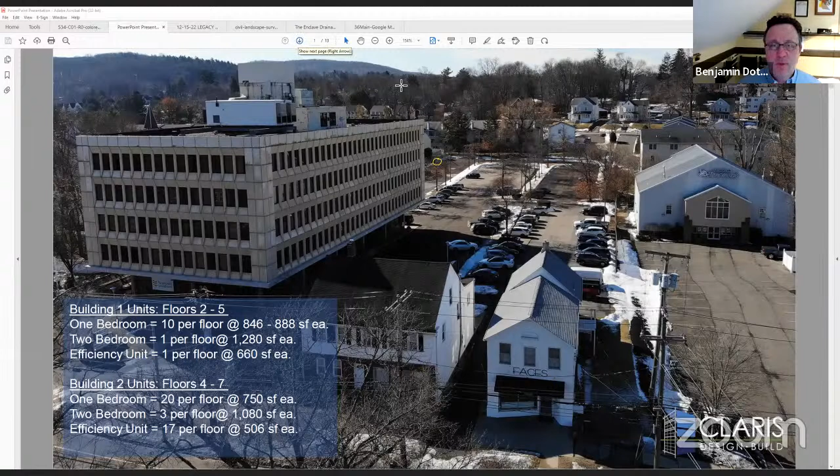Front building, we are adding decks and balconies for the residents. And you can see the main driveway pattern, how the new driveway will function compared to the one we have today, which is a very awkward driveway.

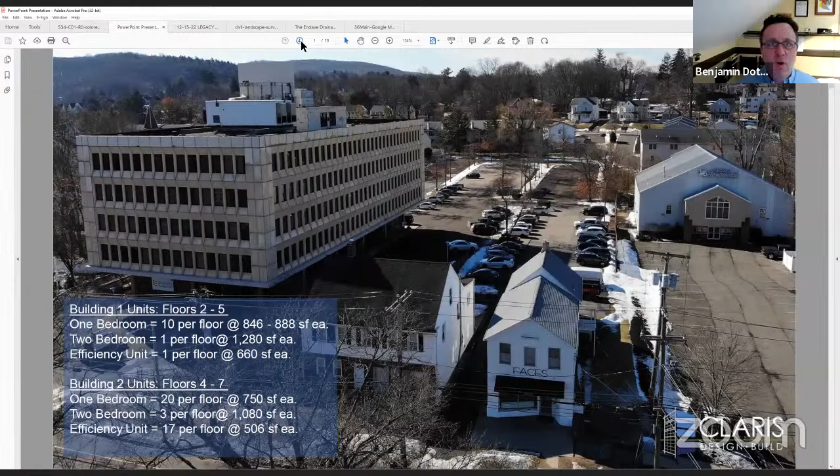The way it was designed was to look like 3, with 4 levels of residential above it in the back. These are just, I'm going to keep flipping through here, so you can get a sense.

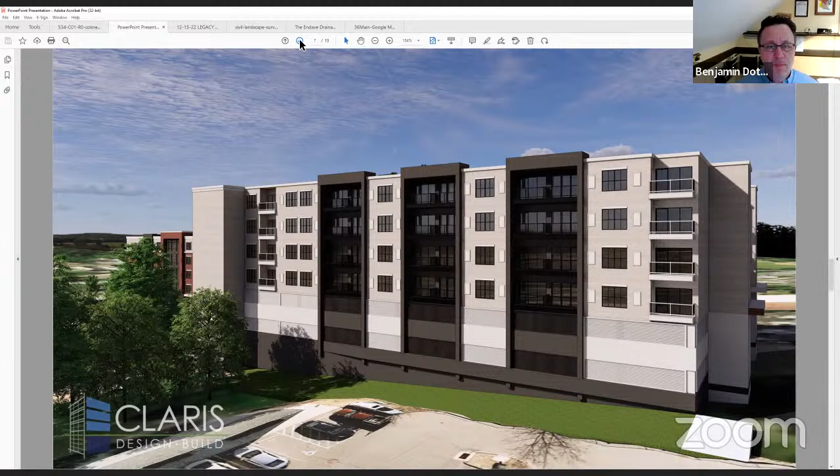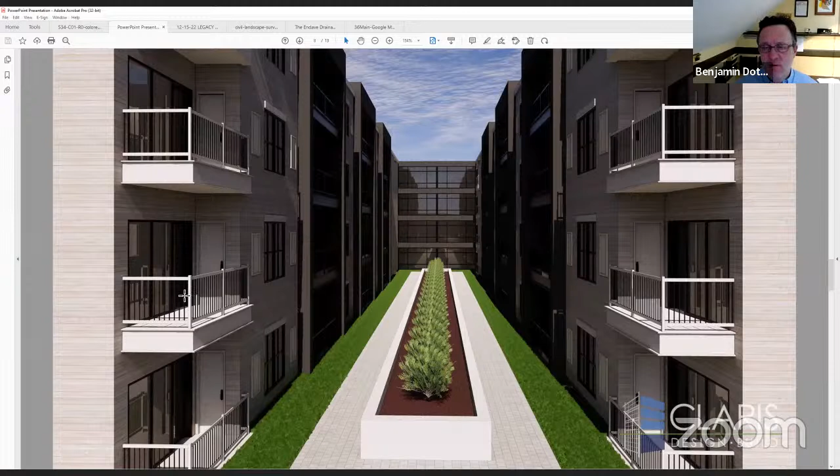This would be a view from the north, looking toward the rear building. This is the courtyard. The rear building has a U shape to it. If you look on the plan, it's a horseshoe shape. So basically, once you get to the first living level on top of the garage, there's an open air area inside that allows the interior units to get some sunlight and daylight, and also have access to the outside.

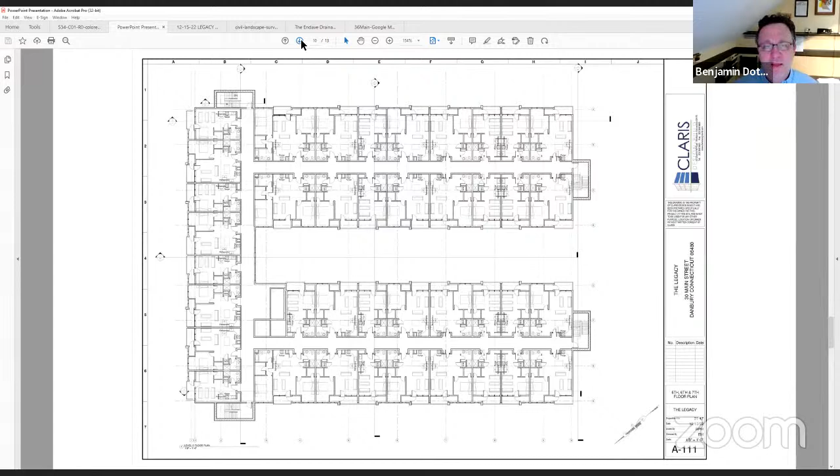This is a standard floor plan of the units of the front building. And the rear building, this is what it looks like. The orientation is opposite to the plan. Main Street in this drawing is to the left. And as you keep going up, these are elevations, all submitted with the plans along with some typical 1 and 2 bedroom units. All the units well exceed the city's minimum for square foot sizes. I know sometimes that's an issue when units get a little small.

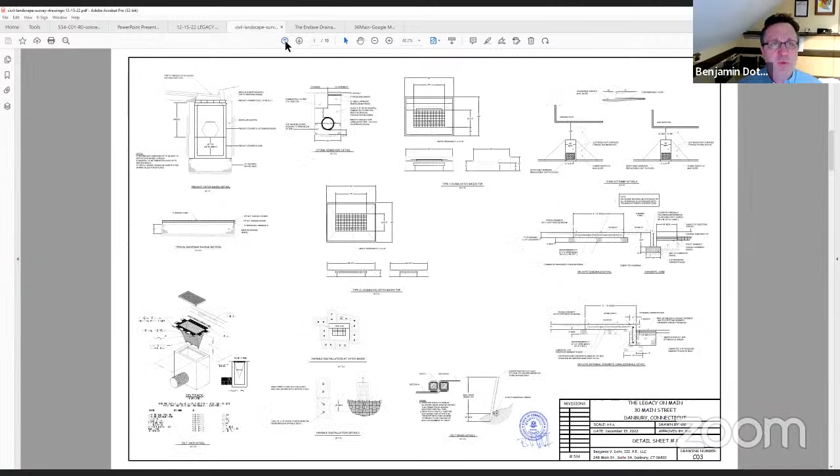I'm going to touch on the drainage and grading right now. I know we haven't received comments from engineering yet, but I do want to touch on that briefly.

There is a drainage system that currently exists on site. The drainage patterns here are unique. This portion of Main Street actually drains south. We don't drain to the area in front of Food Bag and Elmwood Park that's always in the news every time it rains heavily. This portion of Main Street actually drains south, and those drainage patterns are going to continue to do so. Right now there is an underground detention system right here that we simply could not keep and didn't want to keep under the building, that the bulk of the site drains to.

I'm replacing that with a much larger pipe system throughout the site. It's an underground system here. There's also a culvert that comes from the north that drains through the site straight through to the south. We are going to keep that drainage pattern exactly what it's doing, but we're not putting the pipe under the building. I'm just slightly going to relocate it so that pipe runs this way and continues on, as does our drainage system tie here. There's a system in the rear that comes from Grand Street, the units to our west that drain to us, and then they drain south to the Enclave. We're not touching that; we're maintaining that pattern in its existing state. So again, our peak runoff rates will be reduced. The 25-year storm that we analyzed, we're going from about 10 cubic feet per second to about 6.5 with the peak flows.

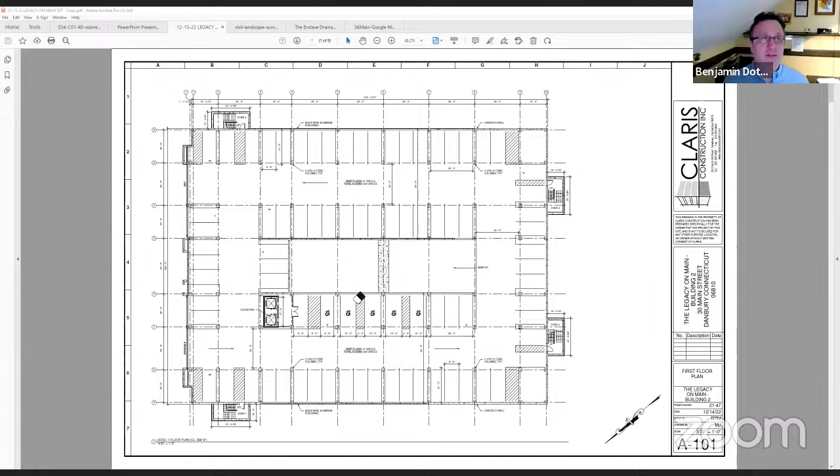The next question had to do with pets. How do pets from the front building, building 1, get to the proposed lawn and pet area in the back? They could walk through the building, through the garage, and out the door into the pet area.

But the way this is going to be done, and this was thought about with the applicant, pets are only going to be permitted in building number 2. Building number 1 will not allow pets, mainly because there's a bank there. It has a different feel, not a complete residential building. So the only pets that could potentially be in building 1 wouldn't technically be pets, they'd be service animals.

You can't restrict those. But again, if that service animal needed to go to the pet lawn area, they can use the pedestrian walk here, simply walk through the garage or take an elevator or use a staircase and come out the back just like the residents do if they had to.

Ally asked for a photometric plan. We showed light poles on this plan. There will be some building mounted lights in some cases. So we're talking with Claris about that, and we'll get the building mounted lights and the photometric plan to you as well.

All existing and proposed utility easements: yes, we are proposing, as I mentioned, a new water main to be brought into the site. The water main is right here, and the purpose of that water main is to get a fire hydrant requested by the fire marshal and then a service to the building.

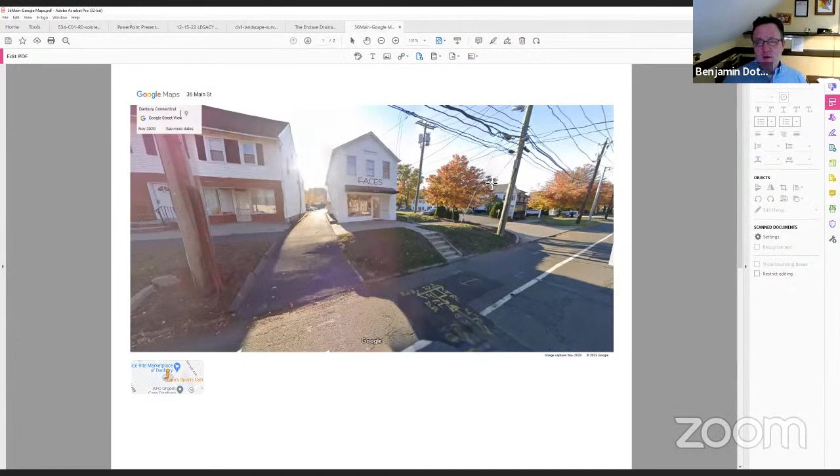Here's the photo. The Faces building is Mr. Prescott's building, and here's his driveway. He has full access to the site. His driveway is probably between 8 and 10 feet wide, depending where you are. This is number 34, the applicant's building. This building is being torn down as part of the project, so this driveway will remain.

As you can see from the joints on the sidewalk in this photo, I'm proposing on my plan to start the new sidewalk here and bring it all the way to the gas station, lowering the grade a little bit. Mr. Prescott doesn't feel I'm lowering the grade enough, but that's really all I can do. Perhaps you can go back a little further here, but you can't lower it past this point because then you start impacting handicap accessibility to his front yard. And it's really not the obligation of the applicant to redo the sidewalk in front of his property.

I mean, if we wanted to, I could have started the driveway-to-sidewalk transition here and just left all that alone. I just tried to make things a little better with the plan I had.

I don't know if his letter will get read into the record, but that's—Ben, yes, Tom, why don't I just jump in and finish this particular part of the conversation?

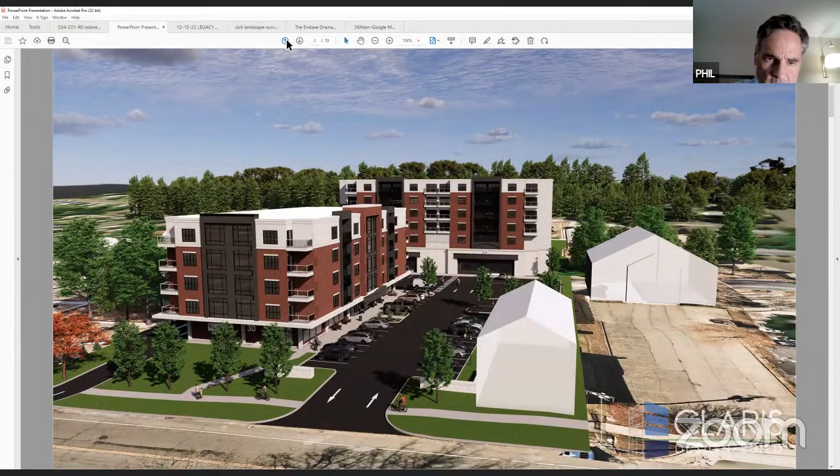And then Ben, if you could move to the next slide. We're going to be replacing it with a more updated look, if you will. Both buildings will look, as you can see on the drawing, similar. We're going to mostly use on the first level applied sandstone block, and then for the body of the building we'll be using a gray cement board, Hardie siding type clapboard. Then there'll be some enhancements, some gray and black vertical ACM panels on the front, and the red tone is actually red brick to further enhance the look. As they said, there are balconies for every unit, and those will have aluminum white and some black aluminum railings. The windows themselves are a black tone, and some are aluminum, some are vinyl. Other than that, that's the basic materials that we're proposing on the buildings.

The roofs are all going to be a membrane roof, and then Ben, if you could slide over to the courtyard. As Ben alluded to, there is a courtyard in the rear building. The rear building again is 3 stories of parking, and then on top of that is 4 stories of apartments. In the center, this is getting further developed, but basically there's going to be some raised planters and other amenities that we're working with. Basically, it allows a lot more light for all the apartments, and that's big with ownership. They wanted us to see what kind of green elements we could put into the building, so natural lighting is a big item to us. The private balconies will have glass doors, again for natural lighting. The roof is going to be designed to support a future solar panel array, and we'll also run conduits to the electrical room for that.

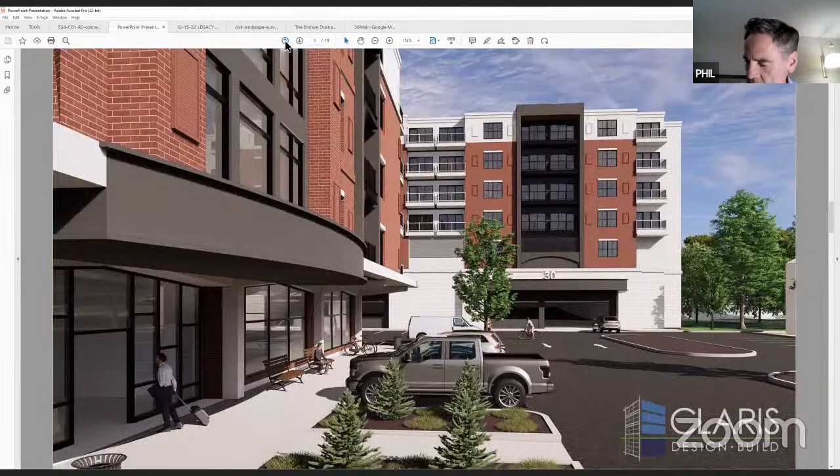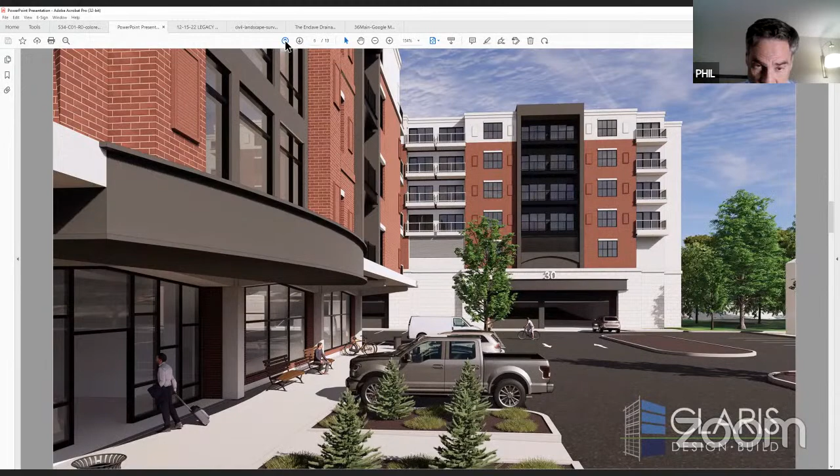The 30 EV charging stations will mostly be located in the parking garage. The front building, which you see on the left here, we're basically going to save, and it's going to save a lot of space in the landfill.

So we've employed, and the energy code these days is very strict, so it's going to be an energy green building. I don't know if we're going for LEED certification or not, but it certainly could qualify. So that's basically the building.

As they said, the first floor, as you're looking at right now, the front building is office. The top 4 floors were office; we're going to convert those to apartments. The rear building is 7 stories: 3 parking, 4 apartments.

There were two questions concerning architecture. One, as Ben addressed, we have a photometric study being produced right now, and we'll get that over to planning and zoning quickly. There was also a comment about maybe some further enhancements to the facade of the front building. We'll get with Jennifer's staff to understand what they'd like to see, and we'll do what we can to make that happen. That's pretty much the presentation.

Questions for Mr. Clark at this point, commission members, or for Mr. Dodo?

I actually have one more thing to add, Chairman, that I forgot. Phil reminded me of it. In Ally's letter, she asked about assigned parking. I forgot to touch on that. We will probably have assigned parking for the bank, but we'll get this to you in the next revision, Ally.

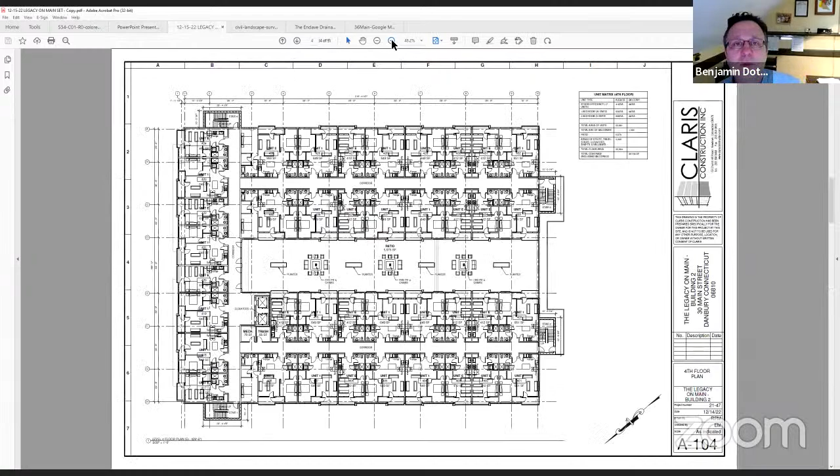I think they're a little smaller, the efficiencies are like 4-12. Yeah, they're 412 on the rear building. The 1 bedrooms are 650 and the 2 bedrooms are 959. But Phil can answer this better. The rear building tends to be rectangular and square, and the front building is a little more irregular.

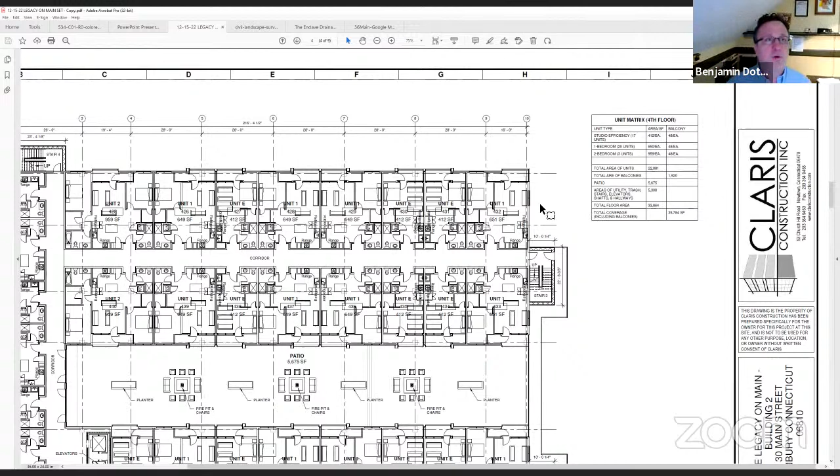Yeah, go ahead, got Phil. No, oh, I got it.

Thanks, appreciate that. Ben, can you just go through the driveway issue again? Did you say that the current customers of that Faces building use the existing driveway on 30 or 34 and then park in the back? Is that what I heard you say?

Yeah, I'll show you how they do it, Bob. They come in the main driveway for 30, like this. They drive around, come in here, and park here. Do some go down this way? Probably, but I'd say the bulk go out the back and come through. But as Tom was saying, there's no easement to make that loop, it's just something that's been done for years. And it's not going to be able to be done with the new site plan, the way we have things situated.

Okay, thank you. You're welcome.

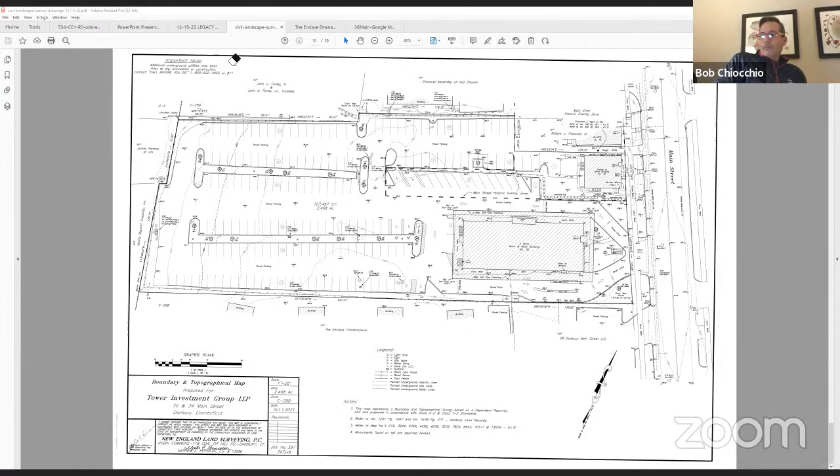Next would be Joe Balskus to give the traffic report.

Tom, do you want me to show Abigail's plan or wait? We can wait. Just for everyone here, it is in the package if you want to look at it. Other than there being a lot of plants, I'm not going to make that presentation for Abigail. Here it is, it's in your package. She'll make that presentation next time.

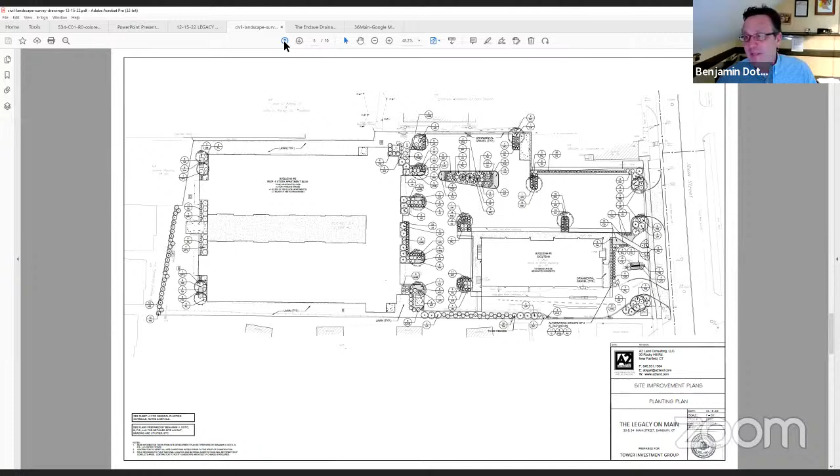Thank you, Ben. Yeah. Hey Ben, can you show your site plan real quick?

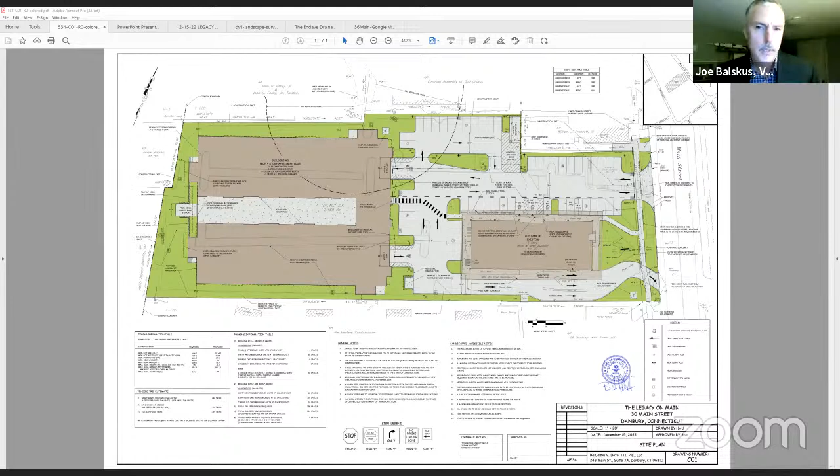I do want to hit that driveway issue real quick before I start my presentation, which I also have prepared. So regarding straightening that driveway out, this being a right turnout driveway, the DOT is going to want it angled as much as possible. I like this layout Ben has. I understand where the comment's coming from, but having this maneuver forces you to go left then right, encouraging that right turn out. If you're going straight out, drivers will be more likely to try and turn left and go north on Main Street. So as long as a vehicle can make the maneuver, I think it's a good layout Ben's got, and it'll work well in DOT's eyes too. We have to go there at some point.

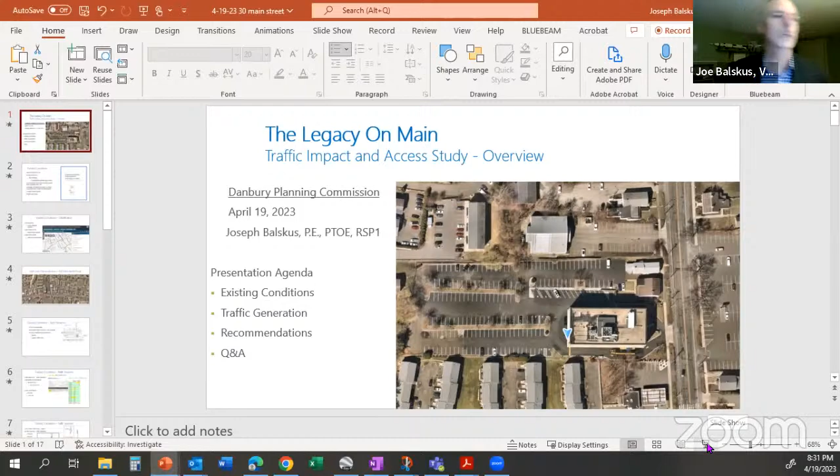So, for the record, my name is Joe Balskus, traffic engineer for VHB, professional engineer. Let me share my screen, I have a little presentation prepared. Can you see the presentation slide now? Yes. Okay, so the agenda: existing conditions, traffic generation, some recommendations or mitigation as part of our conclusions, and then any questions or answers I may provide.

This is a picture of the site itself, on the right hand side, from March of this year. We prepared the traffic impact and access study, as you've seen, it's been submitted. Part of that is the existing conditions. Main Street, as we know, is Route 53, a State Highway. We only have one study intersection, which is the site driveway - it's unsignalized, stop sign control. Main Street, Route 53, is a busy corridor, a connection between Bethel and downtown and 84. In this section of the site it's generally flat, with a slight curvature going north to downtown. It's 25 mile an hour posted speed, and there's ample sight lines.

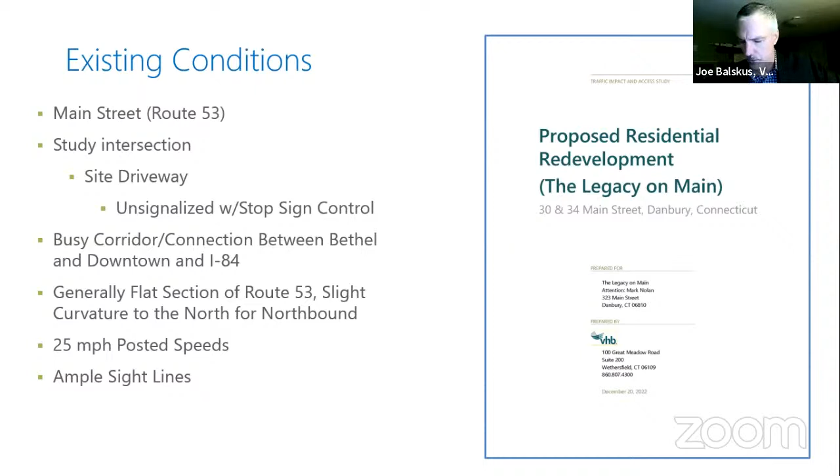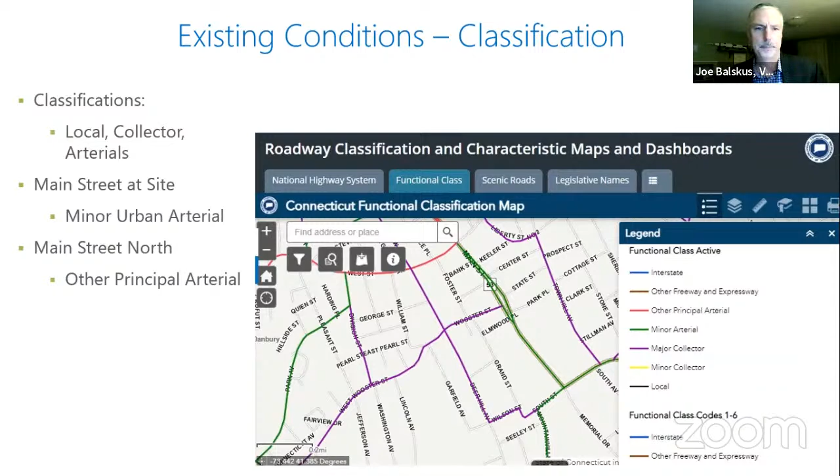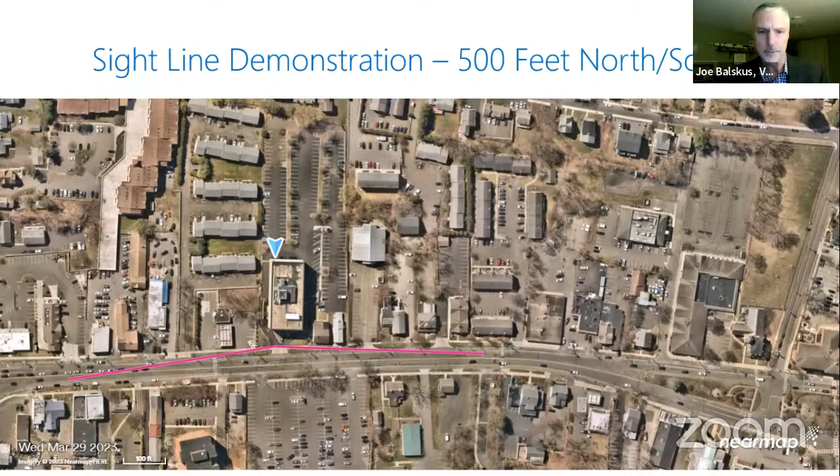Just real quick on the sight lines, we looked at the sight lines. There's ample sight distance looking left and right on Main Street from the existing site driveway, and the proposed driveway itself will also have good sight lines. Both the right turn out and the full access drive will have very good sight lines leaving the site. Here's a little diagram.

We also have DOT. They gave us a functional classification and some traffic counts. Not necessarily the best traffic counts, they're from 2013, but that's what we have to work with, as well as our own counts. Back in 2013, a count just north of South Street showed 960 cars in the morning and 1,200 cars in the afternoon in both directions.

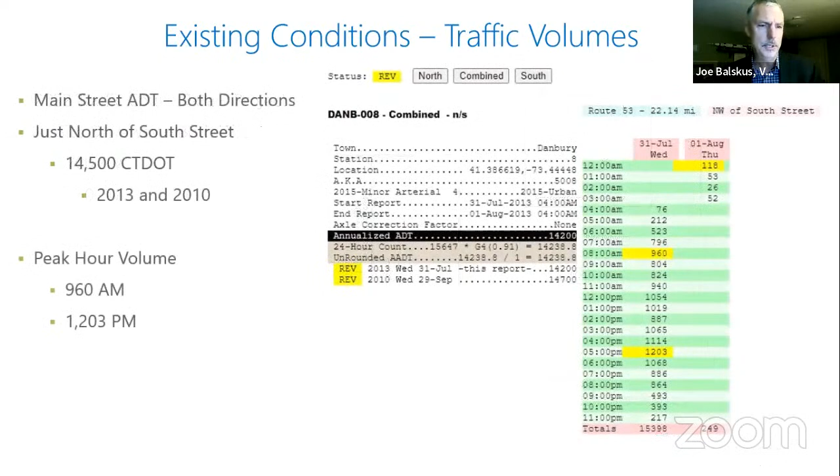So we look at that, and then compare it to our own traffic counts. We did counts out there in December last year, five months ago now, and it's a little lower than 2013. We had 960 and 1,200 then; now we're showing 700 and 960 in the afternoon. So there's a difference in counts. Don't know if that's related to the pandemic or working from home, but we're comparing 10 years of traffic data, so it's a little difficult. We did the counts at the site driveway during peak hours, and they're a little less, but this is what we have to work with since the DOT counts are obviously very old.

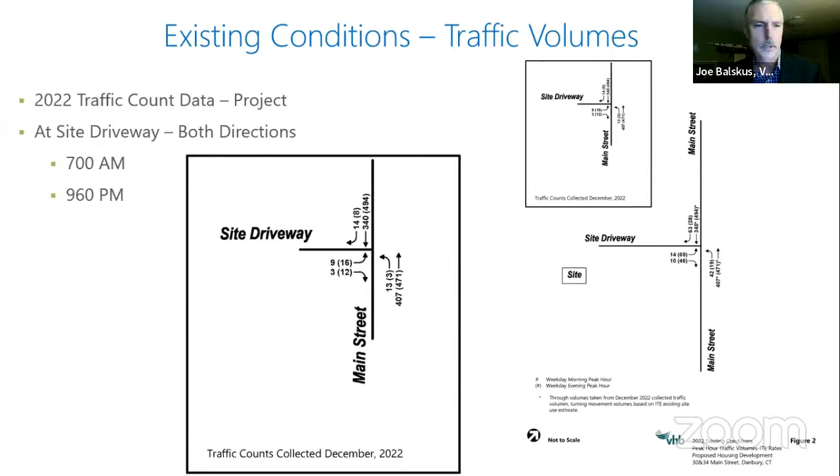Next is traffic generation. What do we generate for traffic? This is where it gets interesting on the project. Looking at the existing use versus the proposed residential, using ITE, which you've heard about in many applications and is approved by the Office of State Traffic Administration for many land uses. The end result is we actually have a reduction in traffic from this project, and that's what I want to show you. This is in the traffic study, and we try to be clear in outlining what we have for proposed uses.

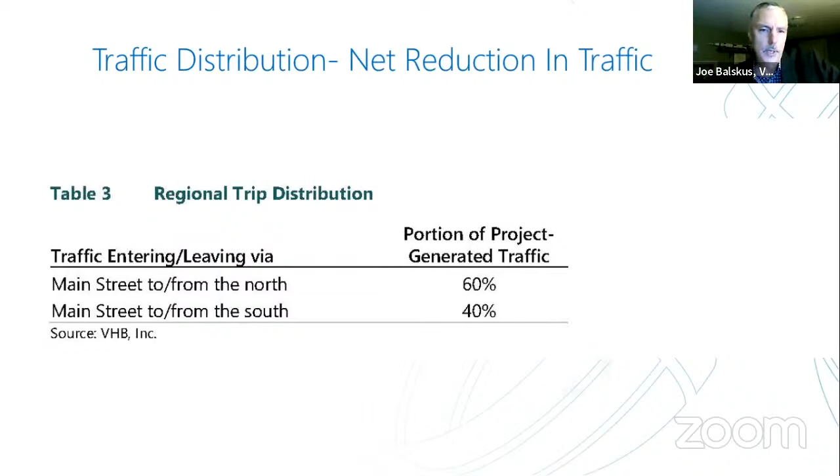So we did a capacity analysis at the site driveway itself. You've heard this before for the morning and afternoon peak hour. Obviously there's going to be a change—there's going to be a betterment, if you will, for the analysis. So there's no reductions in level of service.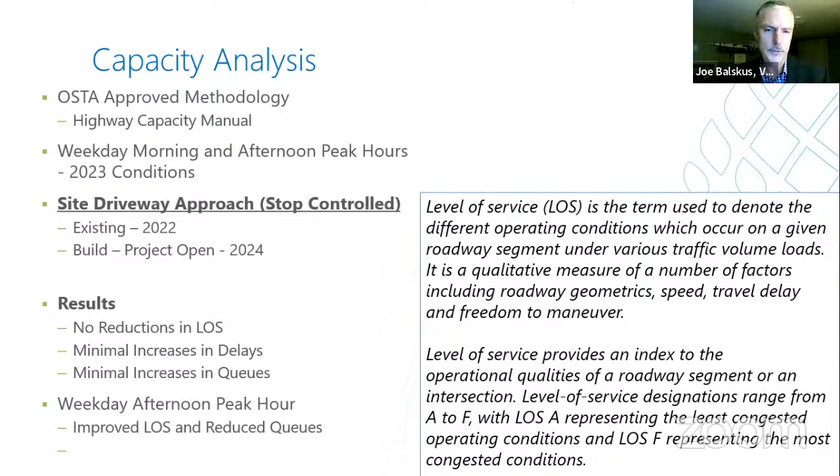There's some increase in delays because we have some differences in when vehicles are leaving, in terms of the morning versus the afternoon. I'll show that to you—some very minor change, but I'll show it with the tables. No reductions in level of service, meaning no change in the A-to-F qualitative measure of level of service and operations.

So the table we have here—this is for the main sector, and I'll be clear, we did not evaluate the right turn out that had been shown, since that's obviously not going to be an issue. We look at the main driveway itself and the traffic from that.

This table, right out of the report, shows leaving the driveway in the morning peak hour. You can go across the whole table for no-build and build, in 2024, looking at volume to capacity, delays, and level of service. No real change in those numbers across the board from no-build to build.

In the afternoon we see a little difference, because that's when the bank and office traffic is leaving, with most office traffic leaving in the afternoon. That's where you had some level of service issues forecasted before, but we're improving that because there's less traffic leaving in the afternoon. The net effect at the site driveway is that it'll operate better with the project because there's less traffic leaving the site in the afternoon.

So that gives you a clear indication of what's happening here. The redevelopment will result in reduced traffic generation, as I mentioned.

We have great sight lines, and didn't really see any patterns in the crash data. The site driveway operates at a very good level of service. We see Main Street free flow operations being maintained—no impact. We didn't see any changes to the northbound and southbound flow on Main Street; it's free flowing. If there was a lot of traffic turning left into the site, that could back up Main Street, but we didn't see that with the analysis.

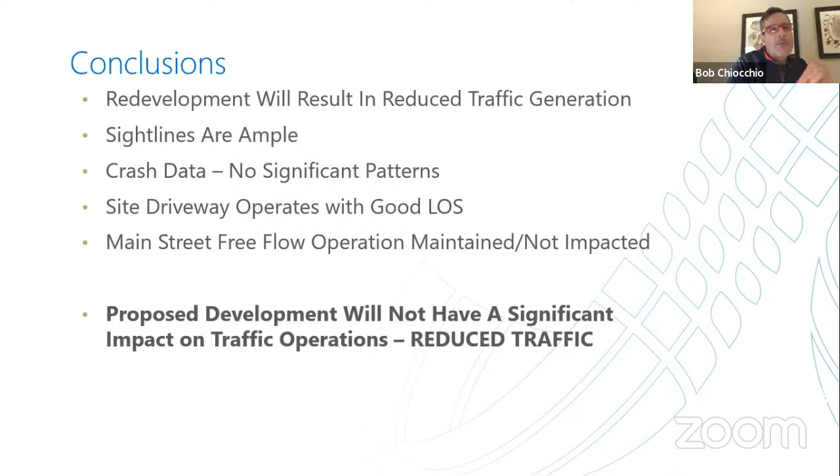So can you just explain a couple of the items there for me? In the movement column, is it the third column from the left? Let me see—this is the location of the intersection.

This is the peak hour. This is the movement, meaning at the intersection: are you going eastbound leaving the site, are you northbound on Main Street, or southbound on Main Street, left or right out of the site drive—left and through for northbound, through and right for southbound.

This is our—sorry, is that okay? Yep, all right. And then these are our calculations: our volume to capacity, what's the actual volume at the intersection versus the capacity of the intersection. There's a factor, and obviously when you're at 1, you're at capacity.

Your delays are seconds per vehicle, calculated by the software. Level of service is based on your delays, that's A being the best, F being the worst, as you know. And then this is Q95.

That's our queuing, the length of your queuing on that approach. So on the eastbound approach in the morning, existing conditions, you have a bank and an office, so no one's really leaving. You have like 10 feet of queue, half a car. In the morning with the development, we're going to see at least 1 car queuing up. The delays are a little, a couple seconds different, not a major change.

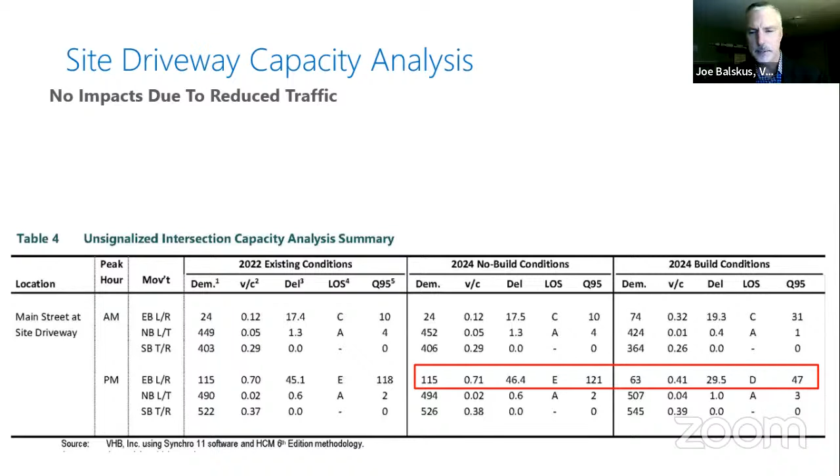Level of service stays the same, so there may be 1 car waiting. It's increased in the morning a little bit, leaving the site. In the afternoon, the opposite is true. We were showing you could have a 4 or 5 car queue waiting to leave in the afternoon, where with this project, maybe a 2 car queue. That's our reduction in queuing, due to losing all the office traffic that would be leaving the site. Now you have traffic coming in for the residential uses on the site. So that's where you see the differences.

Okay, and then if you look at the number of vehicles in the 2024 build conditions on Main Street, the 424 and the 364, why is there less than the current conditions? Is that reflective of there not being an office building there anymore? Is that what that means?

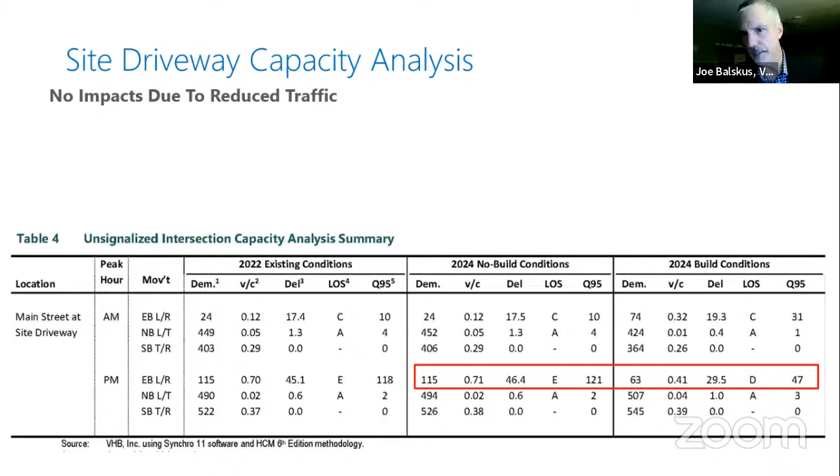Okay, and so that doesn't include the existing counts that you did? Is this just based on the ITE stuff? No, this includes the counts as well as the trip generation that we have.

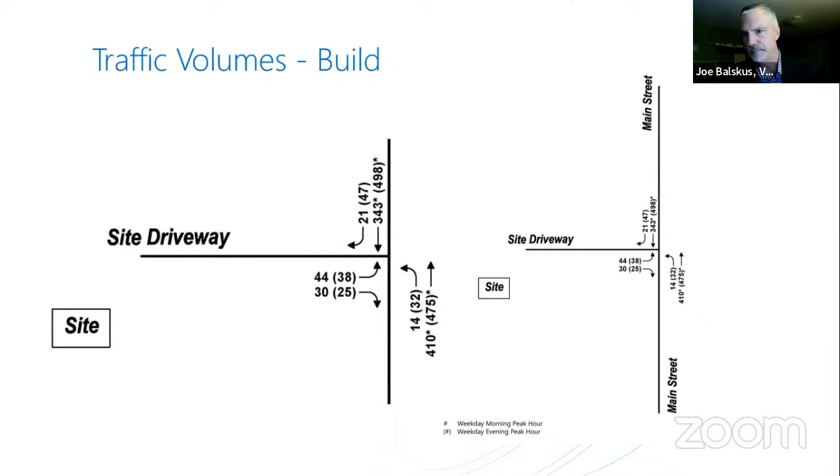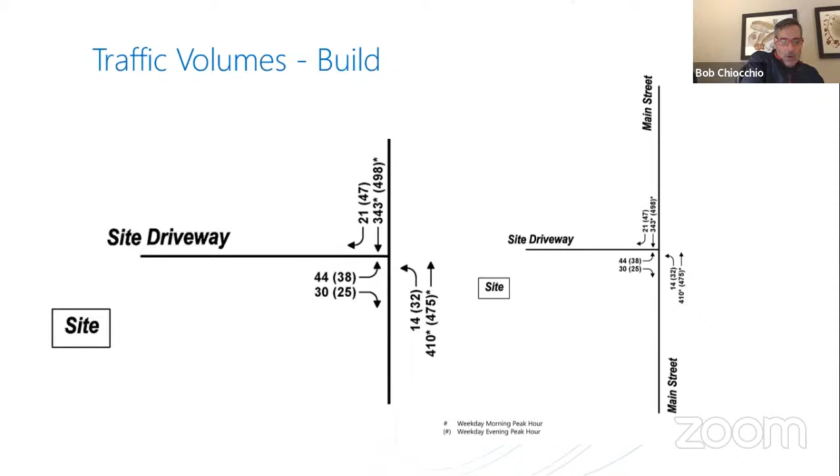Got it, okay. And then, is the office building occupied and people working there right now, or is it unoccupied? Do you know? We projected the office being fully occupied, so our numbers that we're using in our analysis were projecting the office as fully occupied.

Yep, but in reality right now, is it occupied or not? I don't think it is fully occupied. I thought when we did the analysis, it was not. Ben, can anyone help me on that? We projected it being fully occupied, I don't know if it is. I don't think it is. I know there's a lot of lawyers' offices in there right now, Penny Payne is in there, I think Cramer & Anderson is in there, a few.

Okay, so it's somewhat occupied right now? Yeah, it's not vacant, we could get you that answer, Bob. I'd have to get that from our client, but every time I go in there, there are people in that building. Is it 100% occupied? I don't think it is, based on the cars I see out there. We've also come through a strange 3 years here as well.

Yeah, we were being conservative and assuming it's fully leased and occupied, using the ITE numbers, so that way we have a conservative analysis of what can be there. Versus, the reason I was going there is that if it were fully occupied, we'd be having less traffic, but since it's not, we might actually have a little bit more traffic given the occupancy. But I understand what it is, and I'm okay with that.

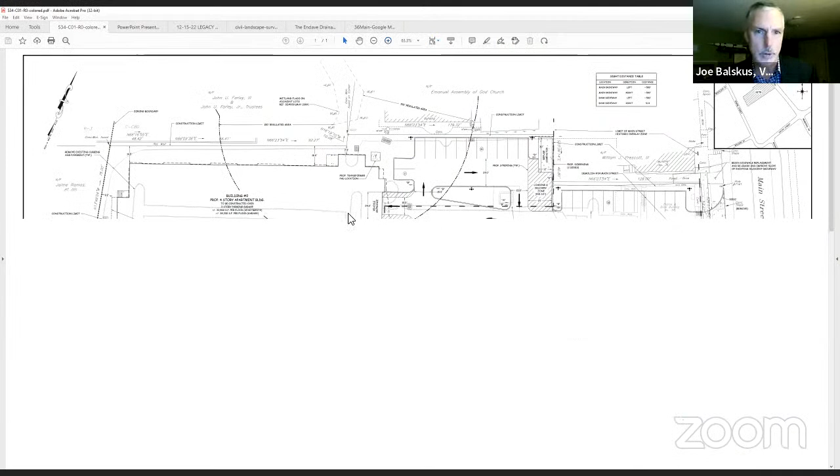Yeah, so the traffic impact study is based upon peak hour. We don't do a daily traffic analysis. We may do a comparison, but for purposes of the traffic analysis, we look at the peak hour. So the traffic being generated is during the morning peak hour and the afternoon peak hour. That's what our analysis is based upon.

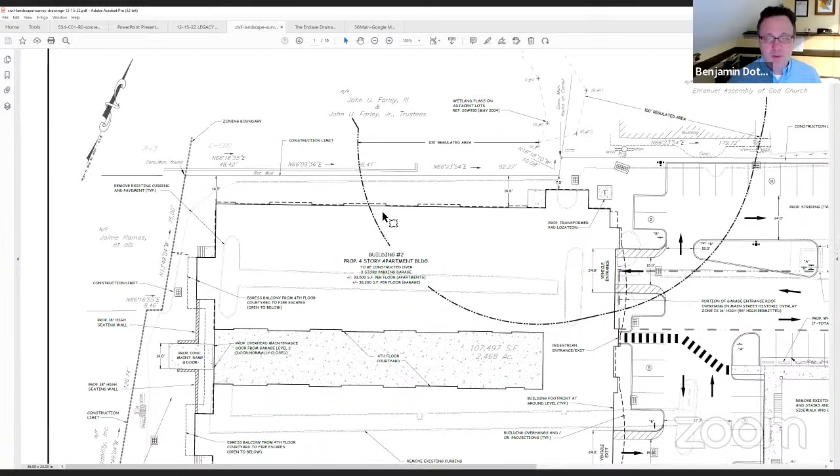Ben's numbers probably show the city's daily traffic generation. That's what you're referring to, Ben, right? You want to zoom in there? Let me get to it. Hold on. Right in the bottom left, Joe. Basically, it says proposed trips 1739, total daily, current 1152.

So you're showing 1248 trips for the apartments, and then a bank is showing 500. And then using the city's trip calculator, you're saying there's less. So from a daily standpoint, using the city's calculation—this is city, not ITE. I don't have the ITE daily calculation, but using the city's calculation, you're saying that we're increasing the daily trips based on the city's calculation.

Okay, I have to look at ITE, and next time I can give you an ITE comparison, but the city's calculation does show an increase, and I know the city's calculation has been very conservative on land use. So I will have a daily calculation. We have peak hour, but I'll provide a daily calculation to see if it's close to what the city's saying. Thank you, Joe. I'm just saying this because I have to show one thing and Joe has to do another in his presentation.

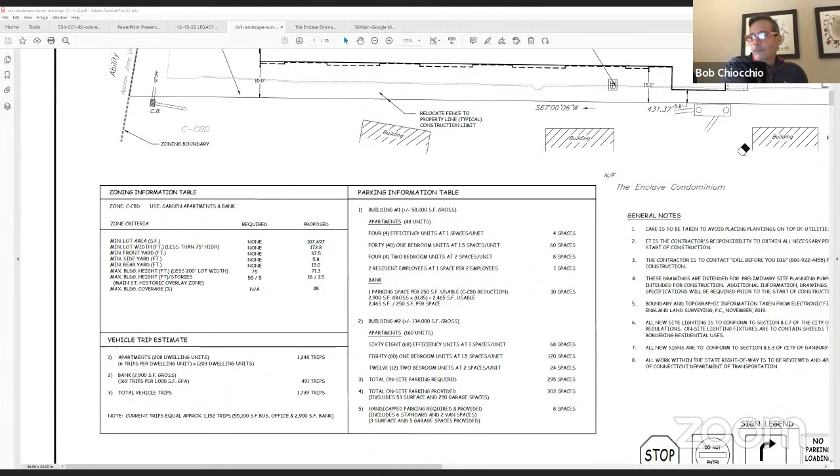And for the record, the city's vehicle trip estimate calculation, doing dozens of applications in the city, most of the time is higher than what we're seeing for ITE. And let me be clear, with ITE, we're also seeing that ITE is doing some updates to the trip generation manual. We know work from home is vastly affecting some of these things. So these numbers that we're using are actually very conservative in terms of trip generation, because work from home has been happening.

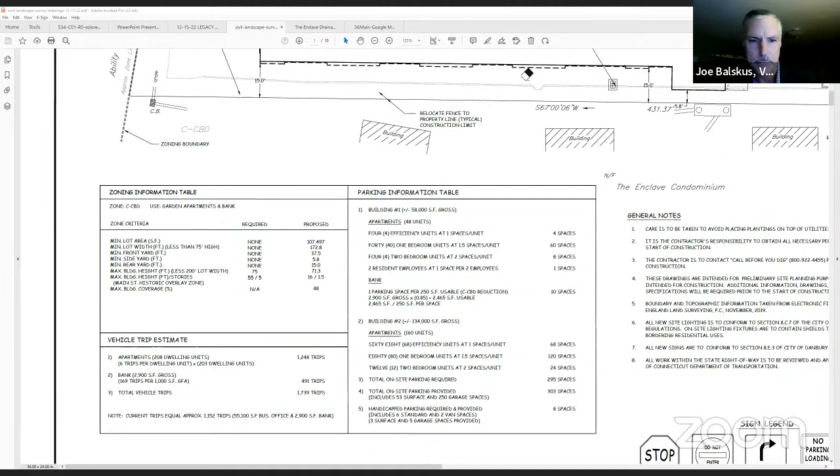Okay. Thank you for that clarification, Ben and Joe. Tom, if there's no other questions, welcome—that's the end of our presentation for this evening. Obviously, we have some further items to submit to the commission, so the hearing should not be closed tonight. Moved over to May 3rd. Sure, okay.

Commission members, any other questions for the applicant at this time? Is there anyone else wishing to speak in favor of this application? Anyone else in favor? Is there anyone wishing to speak in opposition to this application? Mr. Chairman, looks like Mr. Perkins. Dwayne, go ahead. I'm not really here to speak for or against, but I'd just like to make some statements, ask a couple of questions.

Yes, you may, and we'll have the applicant address them. Thank you, Mr. Chairman. It's always a pleasure to see you, commissioners. Attorney Beecher, thanks for the summary of the proposed plans that you all are putting forth. Phil, I didn't realize you were on the call. Hey, Phil. Let me start by saying I'd like to thank the work of the EIC along with Engineer Doto to help advocate and secure a maintenance schedule, a plan that would help maintain the sediment, control some of the erosion, and protect people's properties and the wetlands.

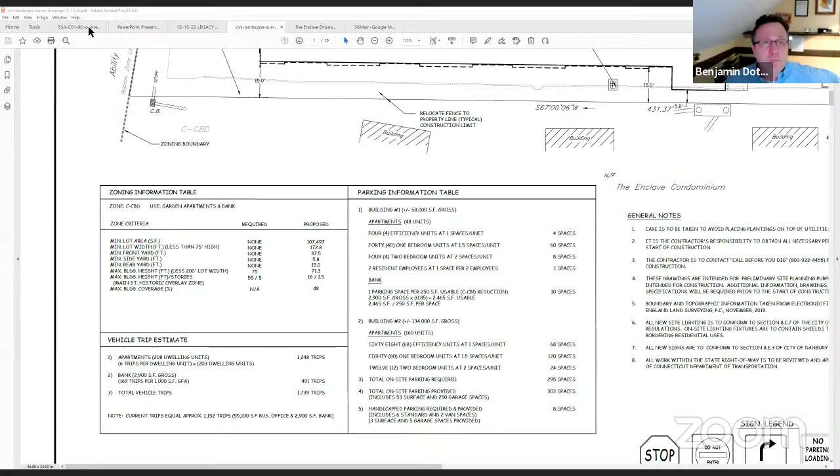Yeah, I'll just share the screen again if everyone doesn't mind. As I mentioned, the main aisle width here is going to be 30 feet, compared to what you have now, a real sharp turn where emergency vehicles have to come in right now. It's a vast improvement, and the fire marshal was happy to see that.

The other thing we did, this rear aisle here is even wider, it's 37 feet. So an emergency vehicle will be able to turn around like this, and if they had to, they could even do a maneuver like this, though I don't see why they would. They currently do not go out this way because this bypass is really tight. Right now an ambulance can go out that way, but a fire truck actually turns around and goes out the in way, so they were pleased to see this.

Again, just to get a sense, look how wide this rear aisle is here at 37 feet. And here's Main Street between the white stripes, and here's Main Street curb to curb. It's very wide back there, and it was done intentionally.

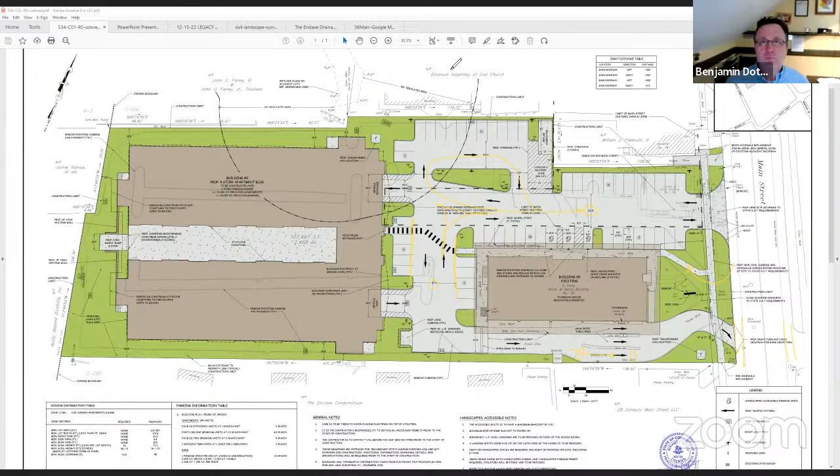Great, thanks Ben. You're welcome. I think we answered Mr. Perkins' questions. You did, but Mr. Chairman, can I have a follow-up? I got a couple more. Sorry.

Mr. Beecher mentioned at the outset of the presentation about statutorily affordable housing. Could we just get a definition on that?

There was another thing. The pedestrian crossing is, I believe I read in that report, 150 feet to the south of this property. Have there been plans to address the crossing? Because sometimes with what could be considered a heavily traveled area, sometimes blinking lights are put up to alert drivers to the flow of traffic across the roadway.

Would that be a part of this consideration? Councilman, we're not proposing anything at this time, but I'll let Joe touch base. Joe mentioned we're going to have to go to the DOT for an OSTA application. I'll hand it over to Joe with respect to that, because that's probably when something like that would come up. And it's also not in front of our site, it is a distance to the south.

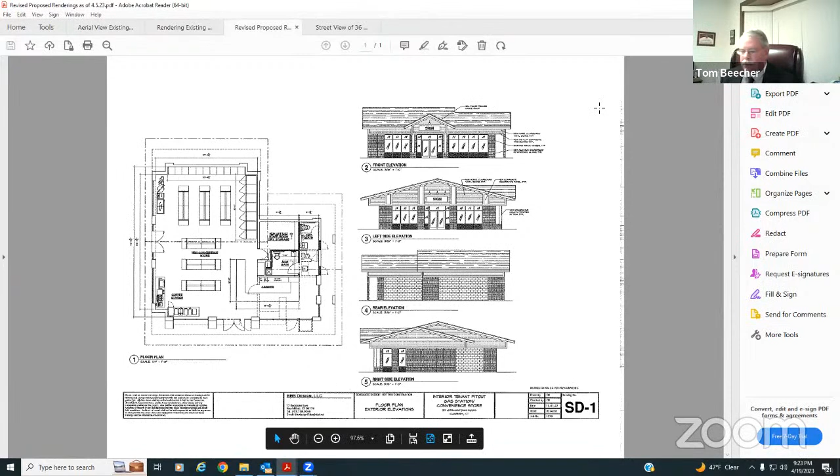Here's the proposed revisions for the building that the architect did. He moved the front doors to the middle and added a roof overhang with false columns. He changed the existing soffit around the building to have siding and trim, and changed the appearance of the side elevations by adding siding, trim, and decorative panels. As requested, he has noted the finished materials that the enhancements would be made of, although it's hard to read on the screen.

He may be a little biased, but he said we strongly believe that making these revisions, the look of the existing building has improved tremendously. Just stop sharing.

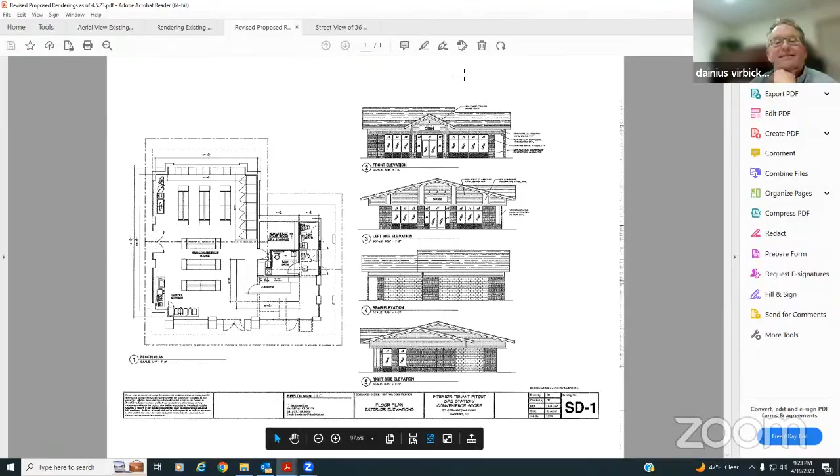The handicapped parking has also been moved as suggested by the building department, and Dainius will go through that in a second. As a result of our discussion with the commissioners at the last hearing, I spoke with Dainius and Jen and Joe Balskus after that meeting, and we also subsequently received a second report from the city traffic engineer.

In that second report, the city traffic engineer recommended that the northerly driveway closest to the firehouse be one-way in, and that the southerly driveway now be one-way out only. We've had a few renditions: we had our own, and we had the first rendition from the city traffic engineer.

We've had a few renditions. This one's one-way in on the north side, one-way out on the south driveway. In talking with Joe Balskus, he agrees that for this site that's preferable, and we're okay with that. We've adjusted our plans accordingly, which Dainius will show you in a minute.

This change will mean that all cars at the pumps will face south. This solves the question raised by Ms. Hofstetter at the last meeting, asking how traffic facing north at the pumps gets out if all 8 pumps are occupied. Now everybody's going to be facing the same way, so they won't have that issue.

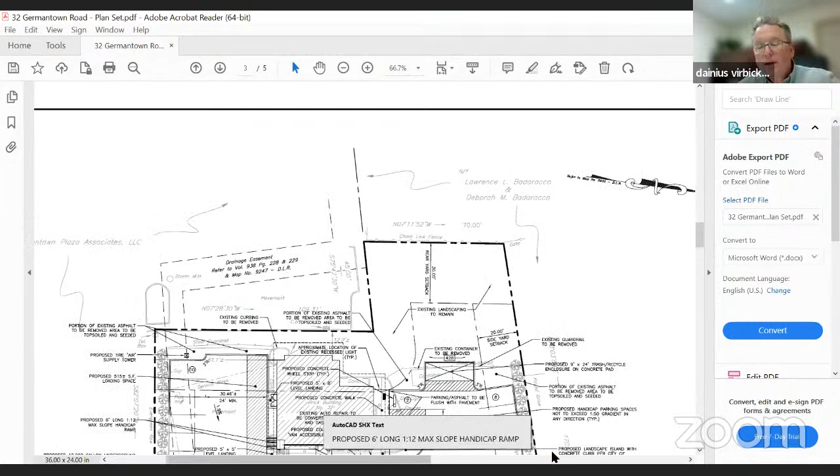So I'll cut right to the chase. Let me get to the site plan and zoom out a bit so we can look right at the modifications we've made to address comments from the traffic engineer as well as from staff, though minor comments at this point.

First and foremost, I'll point to our northern entryway. What we've proposed here is to keep that entryway as is, but put in directional arrows indicating that vehicles are to come in only.

We've set our parking back about 25 feet now from the front property line, a bit further than what it was as it exists and as we had initially proposed it. In doing that, by pushing this back, in order to not lose too many parking spaces, we also pushed back the rest of the parking a little further on the site, to the west.

And we pushed our proposed trash enclosure about 3 feet further to the west to provide a bit of room, backup and turnaround room for vehicles that would be parking closest to the trash enclosure.

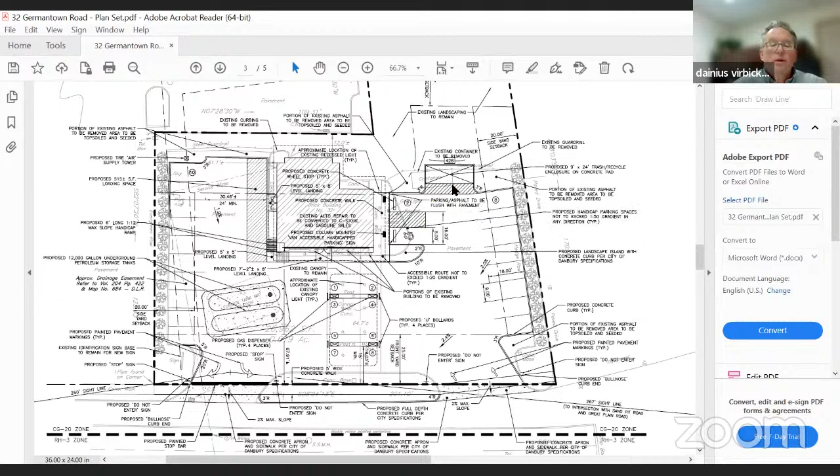As requested by the department, we moved the handicap parking to the north side of the building in this location here. We originally had the handicap parking here, directly across from a handicap ramp that would lead to the front and to the side doors.

We initially left or proposed our handicap parking in the south portion of the site because the primary entrance was going to be from the side of the store. But now, as the front doors have been moved to the front and center of the building, we have relocated the handicap parking to the north side.

And the handicap access here along the edge of the proposed sidewalk. The asphalt will be flush with the sidewalk, providing for easy access to the front doors.

We chose to leave the ramping, though, at the south end of the building, or south corners of the building, to provide access throughout the site for those who choose to use it.

We have also added in a loading space, and the loading space is located in this 30.4 foot wide driveway.

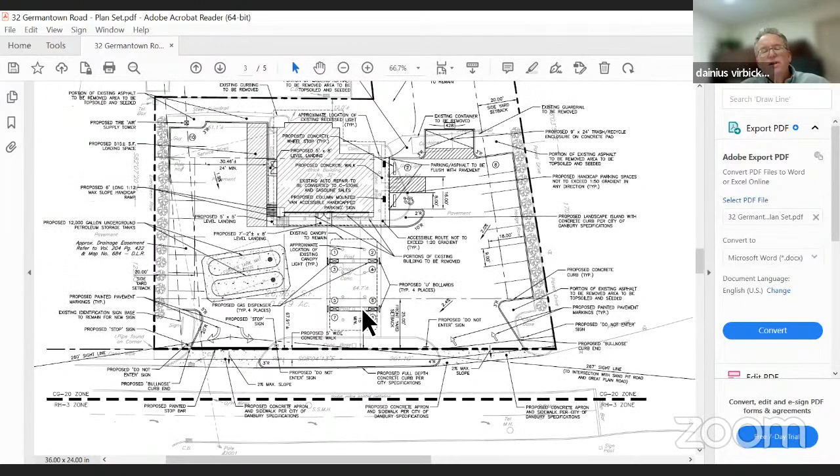On our grading utility plan, the only modification we made here was... oops, come on. This is scrolling slowly. Sorry, folks.

So what we've done with the grading utility plan, no changes to the utilities, but we have added in spot grades at all critical points so that when a contractor is on site, he or she may aim towards the correct elevations, not only in the parking areas, but also at the dispenser islands, the tank mat, and all points on site, including the entry doors.

And that is the conclusion of my presentation. Happy to pass it along to Mr. Balskus. Just before we do that, are there any questions for Dainius?

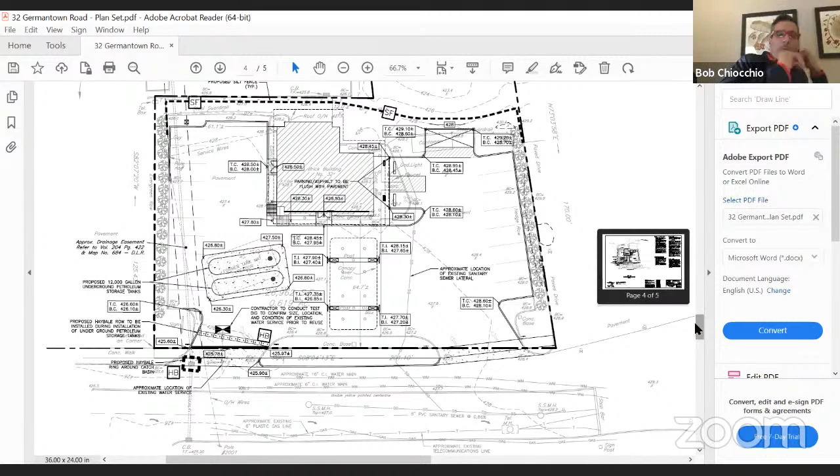I do have a question. I don't know if it's for Joe or Dainius, but the north driveway, will there be any limitations for making a left turn in if you were coming from the north or from the south?

My understanding is that is perfectly acceptable. Joe can go. Okay, and then how many parking spots are on the north side?

The concern I might have is that since it's kind of a one-way in and out, if those parking spots are full and the gas dispensaries are full, someone wanting to go to the convenience store is going to have to wait either for a parking spot to open up or for the traffic at the dispensaries to kind of flush through in order to get through there.

Great question. On the north side parking field, there are 10 parking spaces proposed, including a handicap space. On the south side of the site, there are also 10 parking spaces. So there's a balance, half and half. Plus, again, we've got 8 positions at the fueling dispensers. So quite a bit of parking on site, 28 spaces where 20 are required.

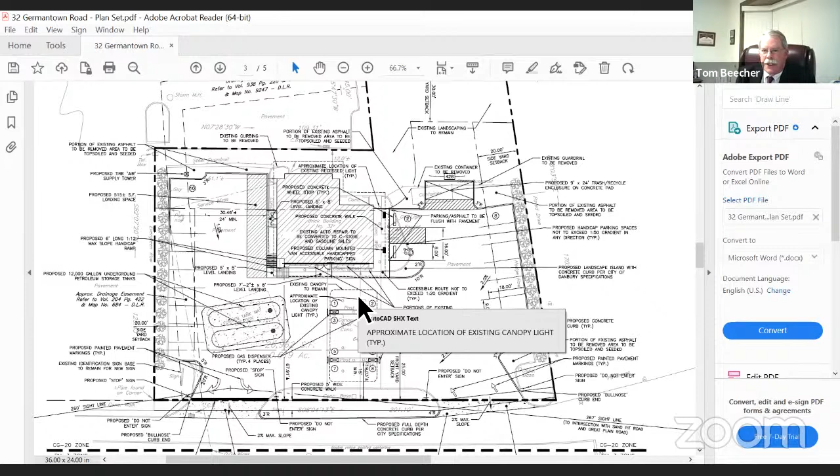Thank you. Since the last hearing date, and in my conversations with Jennifer, she asked me to ask Joe to do a little more of a detailed presentation, put a little more info above and beyond what he presented last time. So he's going to do that right now.

Joe, would you like me to stop sharing or leave it up? Guys, I guess the one, yes, leave it for now for the time being, for one quick point.

The width between the pumps, what's the dimension? It's like 20 some odd feet. It's about 22 feet between the bollards at the edges of the dispenser islands. All right, so 22 feet. So we have cars 6, 7 feet, 14 feet. So it's possible to squeeze a car between those, and between the building and the sidewalk and that pump. My point here is that there is room for vehicles to maneuver between the pumps. It's not 30 feet wide, obviously, but there is room to maneuver between the parked cars that are getting fuel and the building.

For the record, Joe Balskus, traffic engineer for the project. I'm going to give a brief presentation on the actual project itself that I kind of skimmed over last time, as Tom mentioned, because we didn't see any major issues, but have no issue at all with putting together a little presentation for the project.

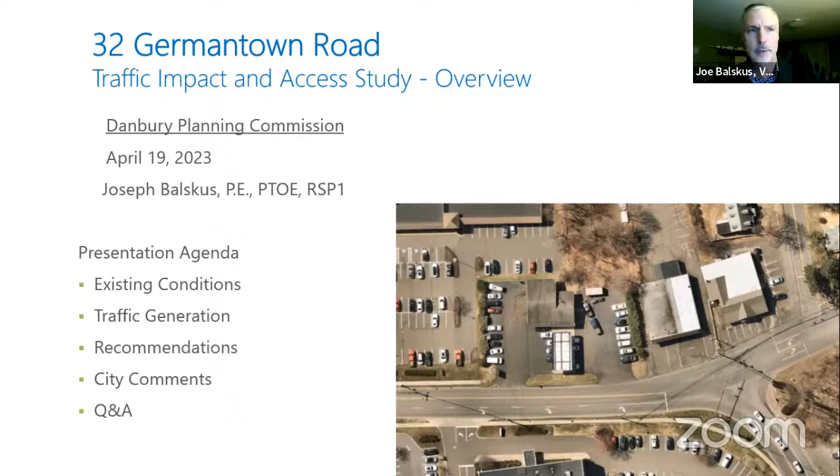So the presentation itself covers existing conditions. This is based upon the traffic impact and access study that we prepared, which you've all seen, and it documents our efforts regarding the existing conditions out there for this project.

We know the Germantown Road intersection is nearby, the fire station is nearby, and Jimmy's is nearby. It's a busy corridor, a connection between the Danbury Hospital area and East Danbury and Federal Road. The proximity to the signalized intersection was an issue with the site drives we discussed. Posted speed is 25 miles per hour, and we have some pretty good sight lines there.

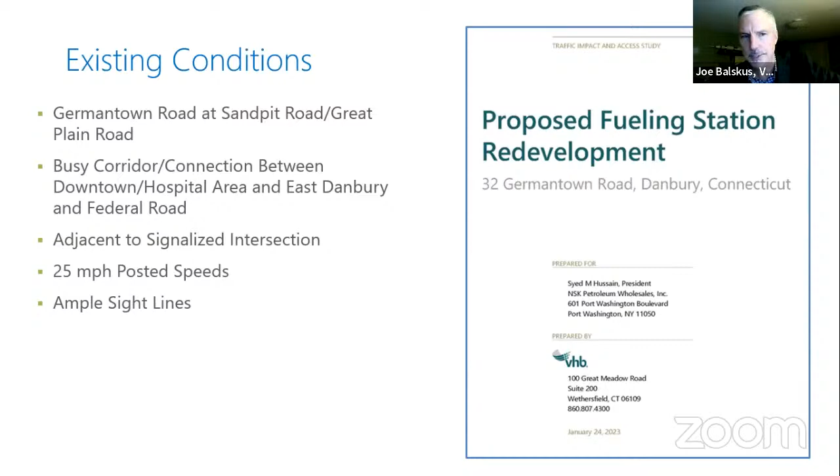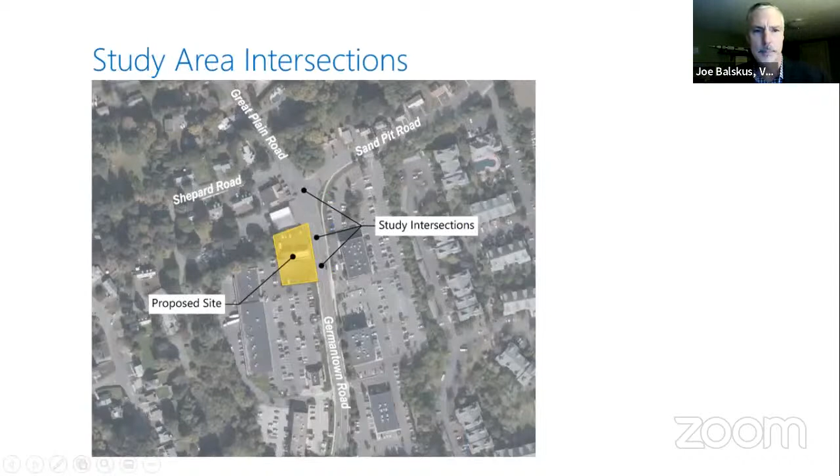The site itself is located as shown here, with the intersection and our study intersections. The two site drives for the existing facility, as well as the signalized intersection of Sandpit Road and Great Plain Road and Germantown Road.

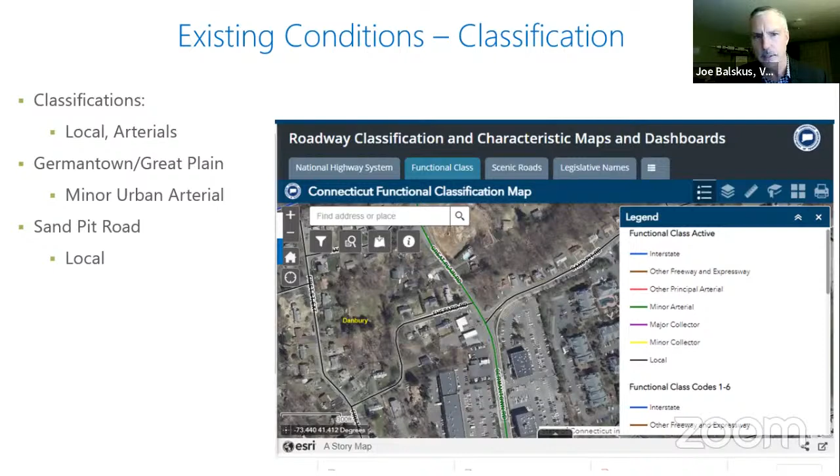Classification: we look at what roadway classifications are, the functional characteristics of the roads the site is abutting. This picture shows a green line in the legend from the Connecticut DOT, considering Great Plain Road and Germantown Road a minor urban arterial. Sandpit Road is considered a local road, not even a collector. This gives a sense of the functional classification importance of the road.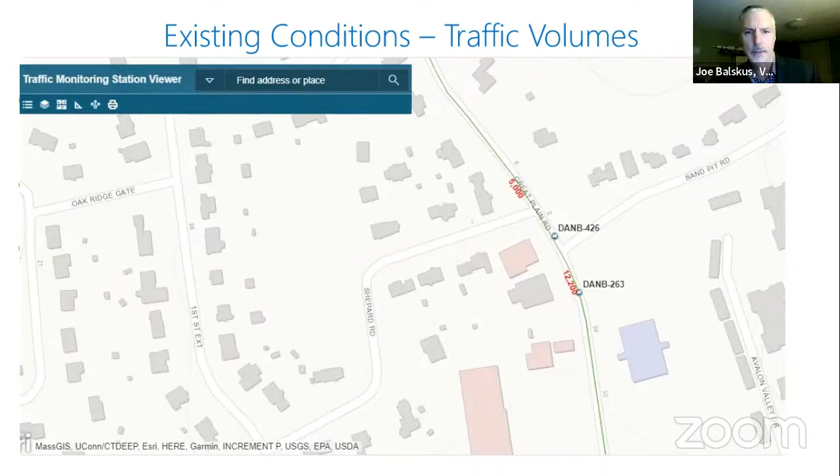So DOT did two counts at the intersection in 2019, and we had some pretty good data for this location. This snapshot of the DOT data shows the morning bi-directional traffic volume at about 1,000 vehicles, and in the afternoon about 1,100, a little more in both directions on Germantown Road itself.

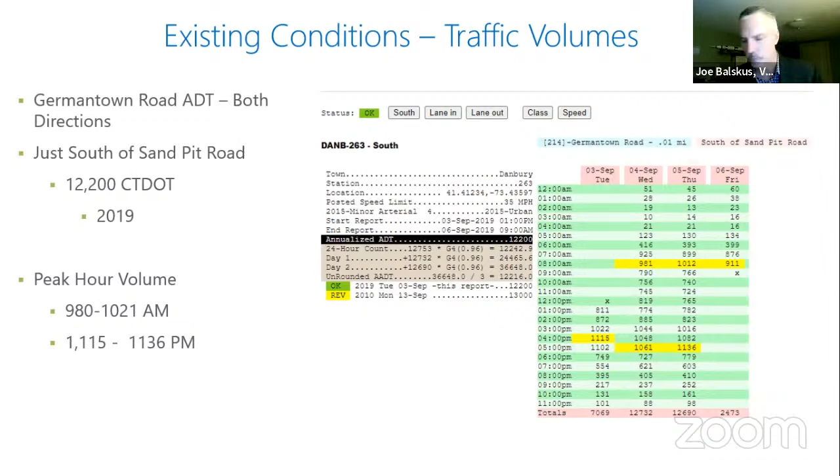There's a lot of detail here, but I want to run through it so we're clearer on the traffic study itself. This also gives the speeds, from near the intersection.

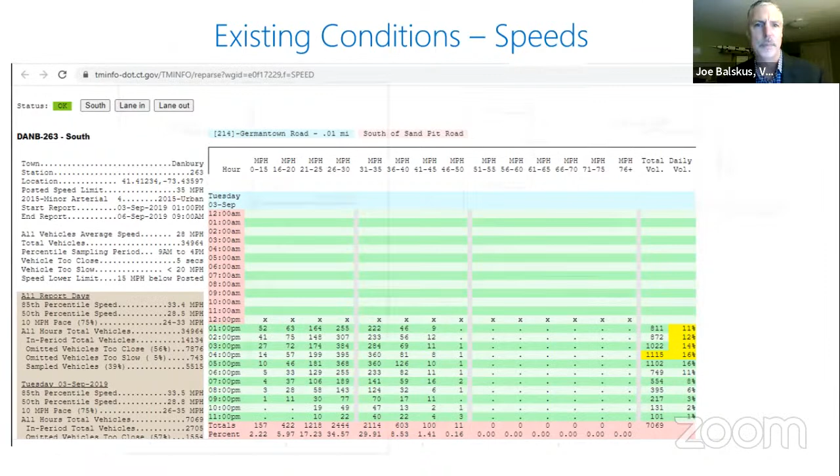We also did traffic counts out here. DOT counted in 2019, and we counted in December 2022 at the intersection at Shepard Road. We have volumes at the driveways as well, so we did an extensive traffic count program here, and we've got similar volumes to DOT.

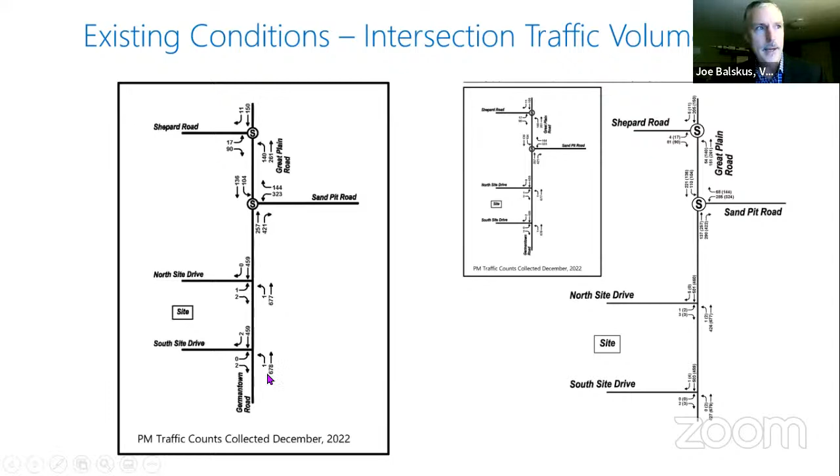In our afternoon count, as an example, we have about 1,100 vehicles. So we've seen similar volumes from 2019 before the pandemic compared to post-pandemic on Germantown Road. That's a good measure that the data we have is good. We had good data before the pandemic, which is unique to have pre-pandemic and post-pandemic, and the numbers haven't really drastically changed here. So that's good to see.

So then we look at traffic generation. We all know the ITE Trip Generation Manual, and the state Office of State Traffic Administration approves our methodology. We look at the existing use, the proposed use, and run that through our manual, following state procedures and policies on methodology.

This is not going to go to OSTA. It's a small project, it's not even going to go to DOT. However, we try to follow those procedures and policies and methodologies because we want to be conservative and we want to follow precedent in how we do our traffic impact studies.

This is a table from the report as you've seen before. I'll just walk you through it again. I mentioned last time there really wasn't much of a change in traffic generation in terms of increase, not a significant increase. We are using ITE numbers for our proposed development, and that's what's shown here.

Key thing with gas stations is the pass-by trip. The table shows the proposed gas station, convenience store, 8 fueling positions: 120 vehicles in the morning peak hour, 150 in the afternoon peak hour. That's a lot of traffic, and that is traffic that would be generated by the proposed project.

But we look at it in terms of new traffic on the road. We know that gas stations aren't necessarily a destination for users—it's typically almost always a convenience. You're driving by a station on your route, or it's on your commute, and you go there.

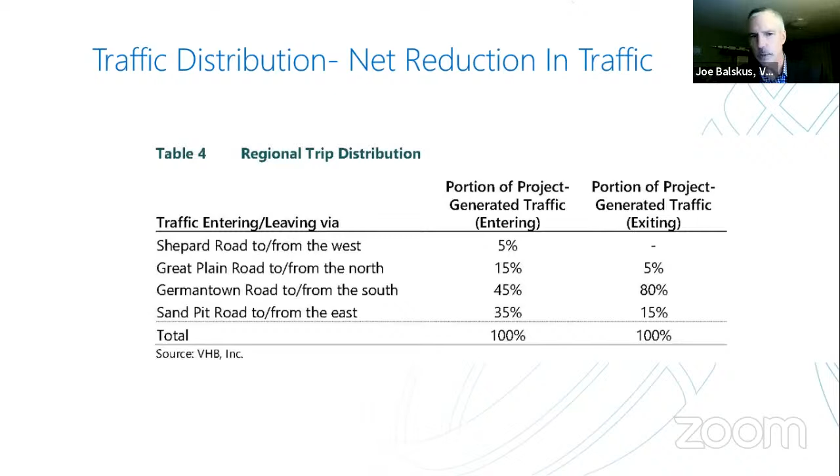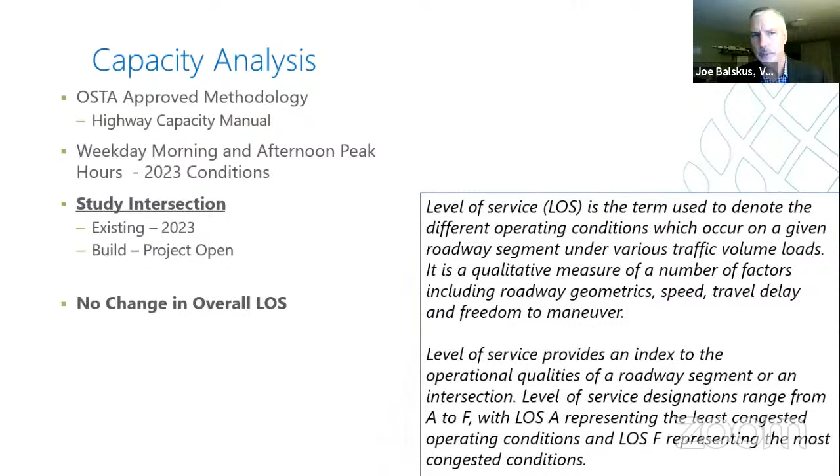We then do a capacity analysis at the driveways as well as at the intersection. The intersection's proximity to the driveways is important—it's 100 and some odd feet to the north driveway and 170 feet or so to the south driveway. Level of service is how we measure the operation of the intersection, and we look at it both in existing conditions and when this project will be open, as a build condition.

This table is in the report, as you've seen. Look at this table in terms of the morning peak hour of Great Plain Road, Germantown, Sand Pit, and Shepard Road as well, looked at separately in the analysis. You have your peak hour condition, AM and PM for both, your movements at the intersection—westbound left, westbound right, northbound, southbound—and then your volume to capacity ratio.

How much volume is there versus the capacity of the intersection? When you get to 1, you have an issue potentially. We don't have any 1s here, as you can see, anything close to 1.

Your delays are in seconds per vehicle at the intersection, over the course of 1 hour—the morning peak hour and afternoon peak hour. Queuing: 50% queue and 95% queue, and then obviously level of service.

So we look across this existing 2024 no-build and build, and what we see here is based upon the software we use that is required by OSTA and Connecticut DOT. Even though we're not going to them with an application, we follow those procedures. You look across and really don't see any changes in level of service, minor changes in queuing, minor changes in delays—very minor. But when you see a change in level of service, that tells you there's something going on. You don't see that at any of these approaches, any of these movements in this table at the intersection.

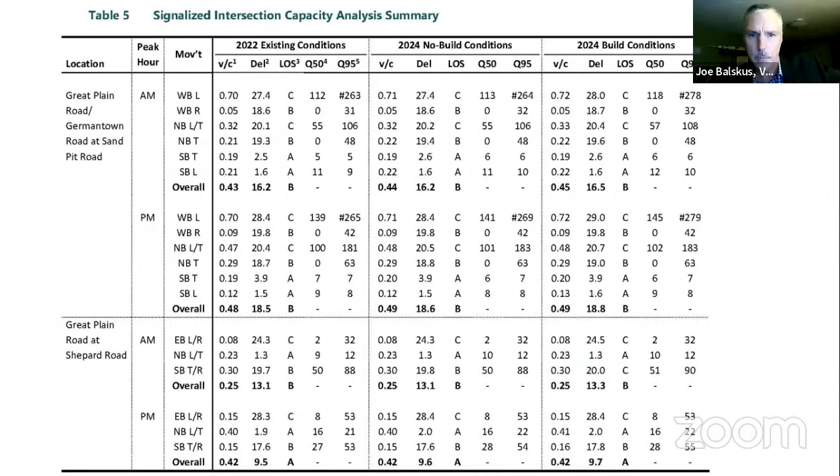So as I mentioned before, the site driveways proposed by the city traffic engineer make sense—we're good with those, as Attorney Beecher mentioned and Donnie's did as well. We're not seeing impacts to the intersection operation because we're looking at only 50 additional vehicles, and that's spread out—some going south, some going north. So you're really not seeing a huge or significant impact. If there were an impact, you would see it: you'd see these delays increasing, you'd see the V/C ratios going up, way up. They're really not changing as you look across this table.

So what does that mean? The driveways are per city comments, we have good sight lines, we have crash data with no significant pattern, we have good driveway operations with good level of service, and our signalized intersection maintains good operation at the adjacent signalized intersection. That led us to our conclusion, mentioned last time, that this will not significantly impact traffic operation.

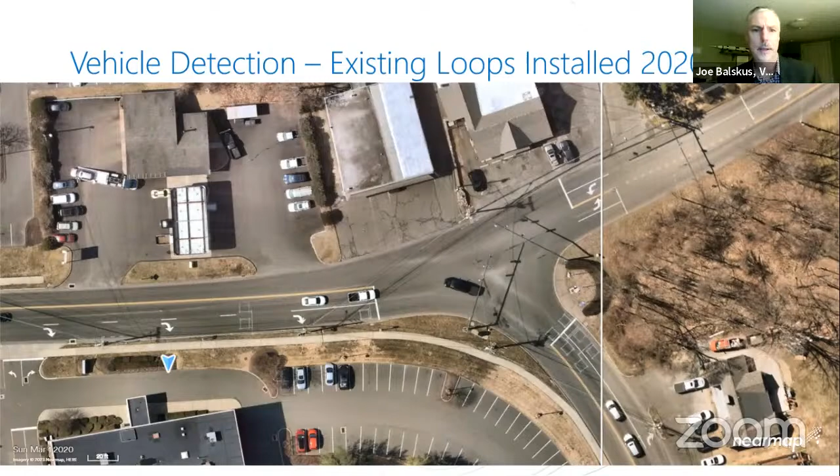So that's something we need to meet with them about, as well as the stamped concrete crosswalk that's being asked for. We expect to meet with them maybe next week and resolve the request. What I'm seeing is there's really no need for video detection here when you have good, new detection in place, but we'll sit down with the city and try to work that out.

Thank you, Mr. Balskus.

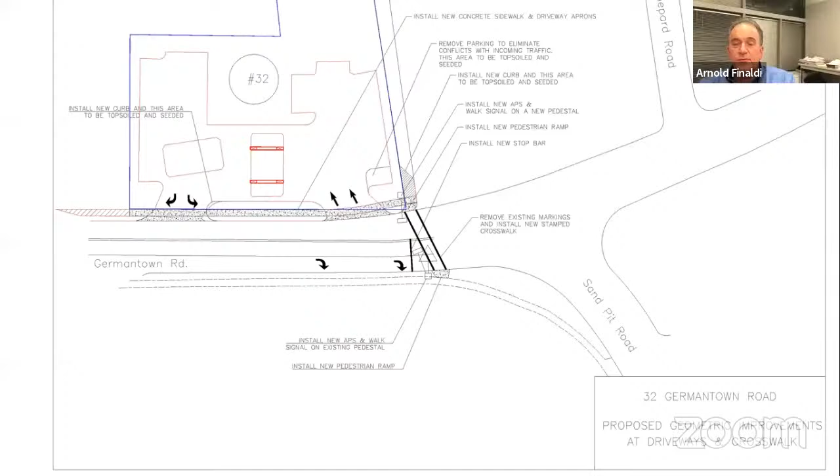Thank you, Joe. Mr. Chairman, at this point we have some outstanding items. We need to file the revised plans we unveiled tonight with the new driveway configuration. We need to see what we're going to do with the crosswalk. Abigail needs to conform her landscape plans to Dennis's final site plan. So we have a few loose ends to tie up. That's all we have for tonight.

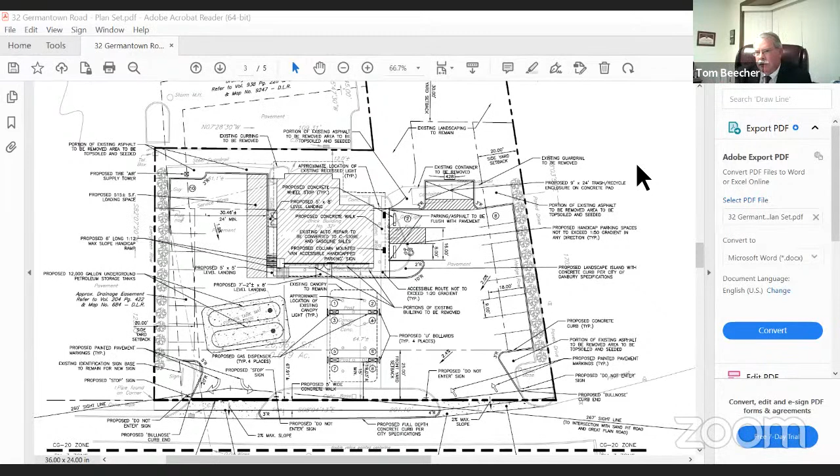So starting with the last part, the pumps closest to the road - that's probably your narrowest, I think it's 15 feet, Dennis, you can correct me on that. But between the outer gas pumps and the road is narrower than between the building and the first set of pumps, and much more narrow than the area between the two pumps. So even if you're pumping and you're behind someone who's facing south who's still pumping, you might have to back up a little bit, but then you can go around, just like many of us do at pumps right now. In other words, that car finishing pumping is trying to do the same thing as someone who was parked over on the north side. Dennis? Yeah, well just to clarify, you're talking about the two pumps closest to the road there?

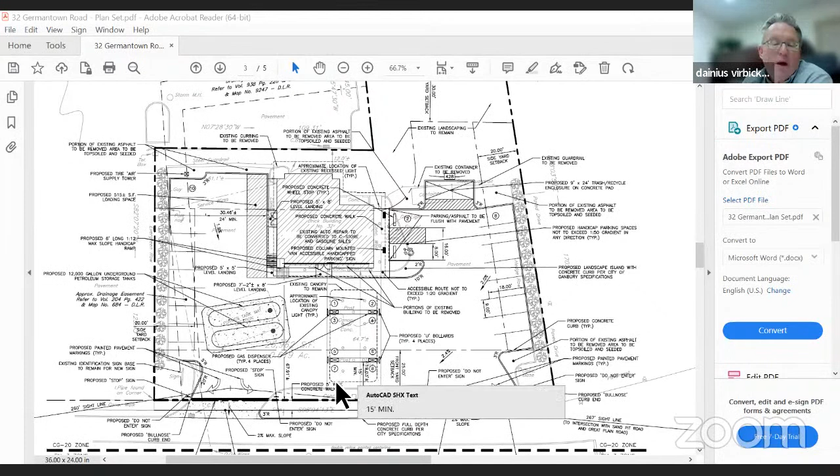Yeah, so the two pumps closest to the road are the two dispenser positions here. There's about 15 feet between the dispenser island and the curb, required along the property line or frontage. Then again, between the dispenser islands, about 22 feet, and from this island to the walk in front of the building, about 15 feet or so.

The building is not changing dimensionally. In fact, we're proposing to remove a section in the northeast corner, which currently juts out quite a bit further in front of the building. This is to provide the landing necessary for operation of the doors, and to avoid some architectural elements that currently exist on the building. We needed to bump the sidewalk out just a bit to provide room for maneuverability.

So this gas station will function basically as it had prior to removal of the pumps some years ago.

Okay, and backing up, if there's queuing, that might not be possible, but I can see it's very tight. I don't know, you gave us feet wide, but I don't know if you put a big truck in there, I don't know how wide they are. So whatever, if you're telling me you think cars can get around, and if they have to back up and get around, it's not going to greatly impede the flow of traffic. I guess so.

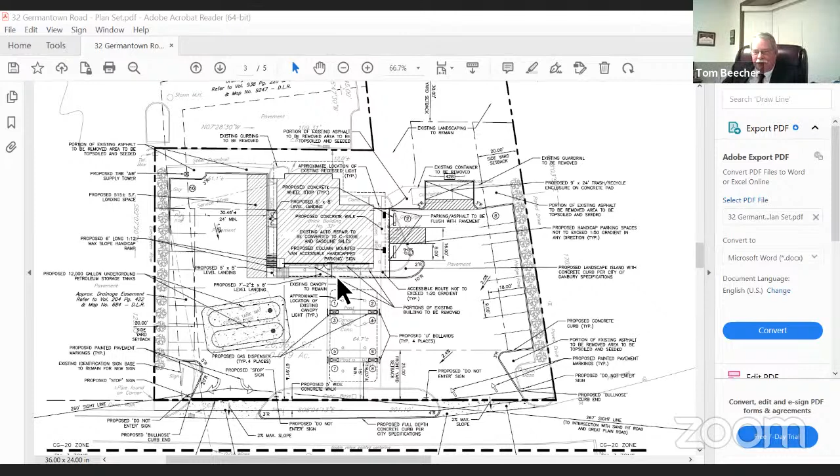Okay, I guess we were moving toward a motion to continue the public hearing until our next meeting, unless there's anything else. Excuse me, Mr. Chair, there's one more person that would like to speak. Who is that? Mr. Robinson. Al Robinson, do you... Yes, see him? There, hello, can you hear me? Go right ahead. Yes, good evening.

My name's Al Robinson. I live at 7 Melrose Avenue. I've lived in this section of Danbury since the mid-1990s, and I've used that gas station several times over the years.

One of the things I want to bring up is that the proposal here is to change this gas station, which was a service station, into a gas station and a convenience store. That is different. I hear people saying this is basically the same, but it's not going to be the same. There's a difference between a gas station with a service station where they're servicing vehicles versus using this same footprint for a convenience store. Just by changing it to a convenience store, you're going to have more traffic in that area.

I've always been very concerned about this particular intersection. It's a pretty tricky area. Whether you're coming from Osborne Street going towards Great Plain, or coming from Great Plain and dealing with the intersection at Shepard, and then the other intersection if you want to make a left turn from Great Plain onto Sand Pit—it's a very tricky intersection, and you do have situations where you are queued up over there. Also remember this intersection leads down towards Sand Pit, where there are a lot of medical buildings, so there is significant traffic throughout the day. This is a busy intersection.